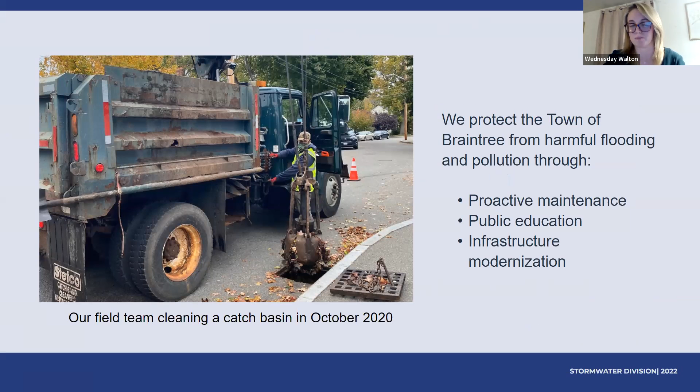So with that being said, what is the Town of Braintree Stormwater Division? We protect the town of Braintree from harmful flooding and pollution through proactive maintenance, public education, and infrastructure modernization. We came to be in 2018, and our official outreach mechanism is Clean Water Braintree. So we are on social media at Clean Braintree on Facebook, Instagram, and Twitter. We use our social media to give general stormwater information and educational pieces, as well as updates on projects, grants in the area, that kind of stuff.

And then we also are on SeeClickFix. So if you have any stormwater related issues that you would like to report, whether that is a clogged drain or you're noticing some flooding, feel free to report any of that on there. We do all get an update immediately when those are put through.

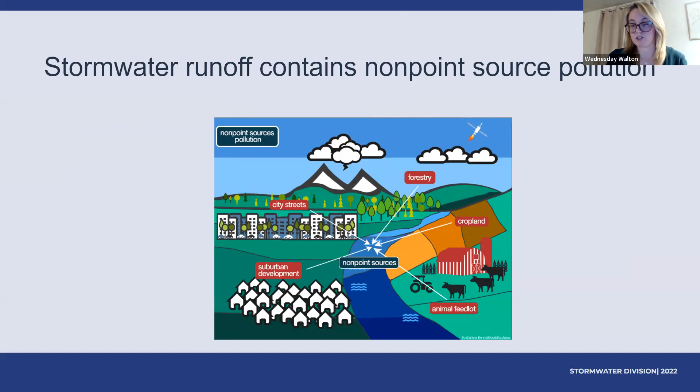So the reason why we created the Stormwater Division in the first place is because Braintree water bodies fail state quality standards. Non-point source pollution is the primary cause of these failures. Essentially, non-point source pollution is when rain, snow, sleet, any form of precipitation falls, that is stormwater. It hits surfaces like mountains, streets, developments, croplands, farms, etc., hits the ground, picks up pollutants, and carries it into water bodies. And that's what causes a lot of the pollution and a lot of those failures with the state.

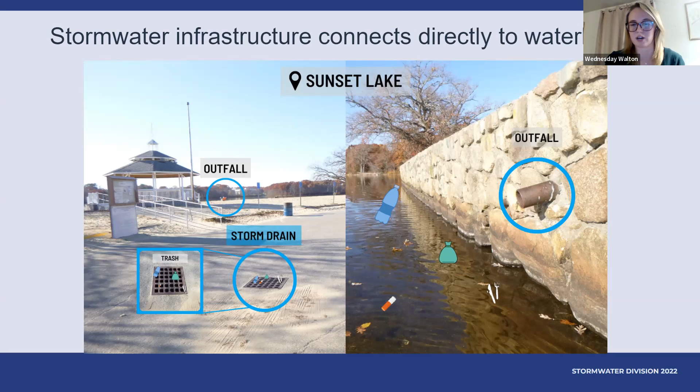Stormwater infrastructure is what takes that water into the water body. So as you can see here, probably one of our best examples and our most visual examples that you can go take a look at yourself is at Sunset Lake. We have a variety of storm drains around the parking lot there. And those storm drains connect directly to that outfall that you can see. So anytime there's trash, debris, leaves, salt, any form of pollutants, they go directly into that drain and then pour out into Sunset Lake, as you can see there.

So what is green stormwater infrastructure? Basically, GSIs, or green stormwater infrastructure, use natural and low impact technology to capture and treat stormwater on site. So a good example of this is, again, at Sunset Lake, we have a rain garden that captures the rain that comes in. The water soaks down and goes through a filtration system and then puts the treated water back out. You can also build these at home, but these are probably some of the most common ones that you see. And these are also what we like to use to try to fix any pollution that we have in the town.

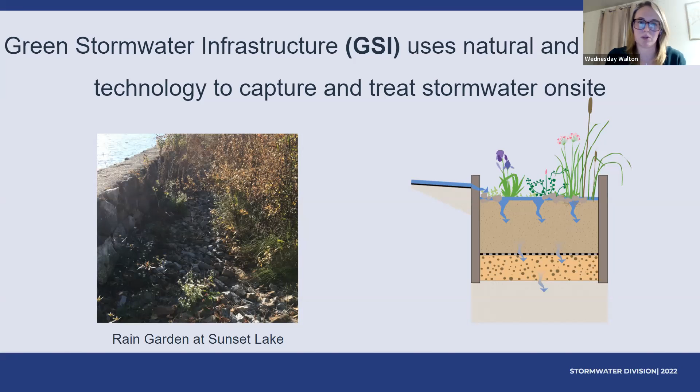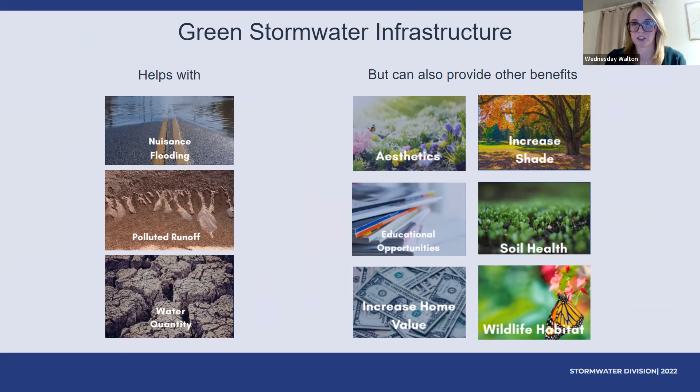These structures typically help with flooding, polluted runoff, water quantity, but also they help just boost the aesthetic of the area. They provide educational opportunities, increase home values, increase shade in the area, soil health, as well as wildlife habitat. So that brings us to the project that we are currently working on at Smith's Beach. And this is where I will hand it off to Hillary.

We eventually come to a point of conceptual design. We review that design, we refine it. We come to eventually final design. At that point is when we start to get permits from state, local, maybe even federal authorities, depending on the size of the project. Then we get our funding together, then we build. This can take anywhere from a few months to a few years. And so we start with, in this case, identifying a site.

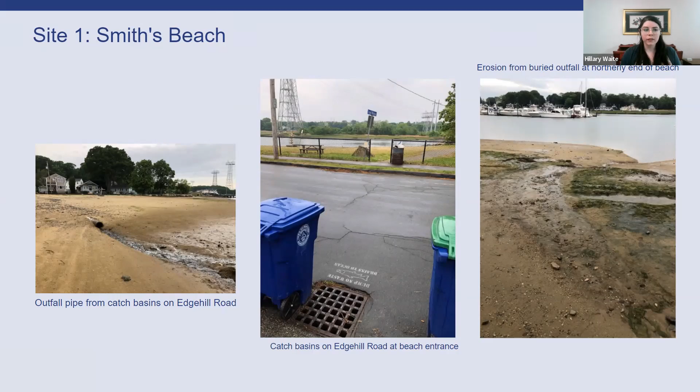And you can see from the street at Edgehill Road the stormwater drain where eventually it leads out to those outfalls. And that's the parking lot. Thank you, Wednesday. And you can see the parking lot doesn't drain very well. It's pretty wet, even though this isn't a wet day. And there's just puddles everywhere. The parking lot's a bit patchy.

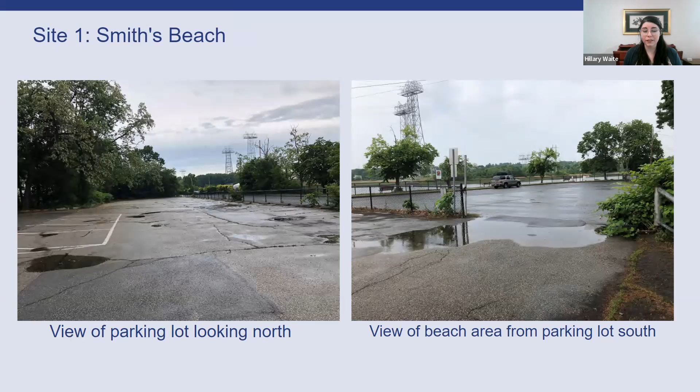So we're thinking maybe the next time we come back to this parking lot and do work on it, maybe we can make it a little bit better. So that's how we ended up picking Smith's Beach as a potential site. So from there, we had to study it a little bit further.

And some of the things that we do, we confirm the existing drainage in the area so that we know exactly what we have there, what we could use in future designs because it's already there. And we also, at this site, performed some soil tests to make sure that water could actually infiltrate. Does that soil drain well?

Is the groundwater level low enough that you could actually infiltrate into groundwater, or would it just be rising up into the project itself? So we know from the study that we've already done here that the groundwater table is suitable, the soil is suitable, we can do infiltration here.

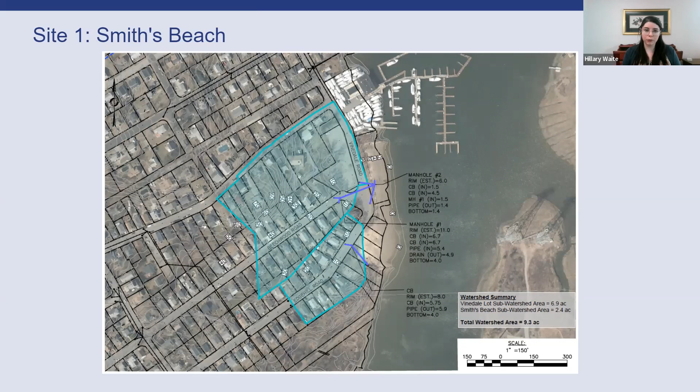And the next slide shows that upstream watershed for this project. So it takes some of that upland neighborhood, the stormwater that's coming through there and out those outfalls that we showed you, and instead it would kind of stop at this project. And that existing drainage that we already have will stay in place and we'll reuse it as overflow structures. So we know the site is good and we know the site will work.

So we go here to conceptual design. We basically put together a general idea of what the project will look like, what engineering strategies we're going to use, its approximate size and shape, and the goals for the project. And that conceptual design looks like this. And what we have here is the Vinedale Road parking lot.

We propose a porous pavement, also called a permeable pavement, which is a special type of asphalt that essentially lets water run through it instead of off of it. And in the beach itself, a smaller infiltration trench to help us take some of that drainage and infiltrate it down through soils and groundwater instead of out through that outfall, creating all that erosion and scour in the river.

And can we go back for 1 second? I also want to talk about the landscaping there. We also have observed this parking lot. It's a blacktop. There's not a lot covering it. And we took this as an opportunity to say we could add some landscaping here. We could reduce some of that heat island creation. And so that's why even in our conceptual design, we show trees and landscaped islands.

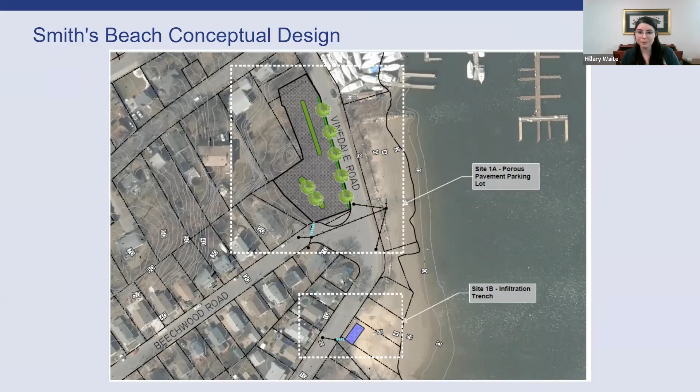They're pretty, they're shapes and you can see the trees, but now as we go forward with the design we're about to show you, you'll see there's some pretty significant and good looking landscaping planned there. And we're almost there. So now the stage we're in is design review. And so we're drawing closer to this final design. We're drawing closer to the permitting process, but this is a good time for us to come out and specifically ask for feedback on the details.

And to go over those details, we have our engineers here from Nitsch, which is excellent. And I am going to give them their full introductions as they're due.

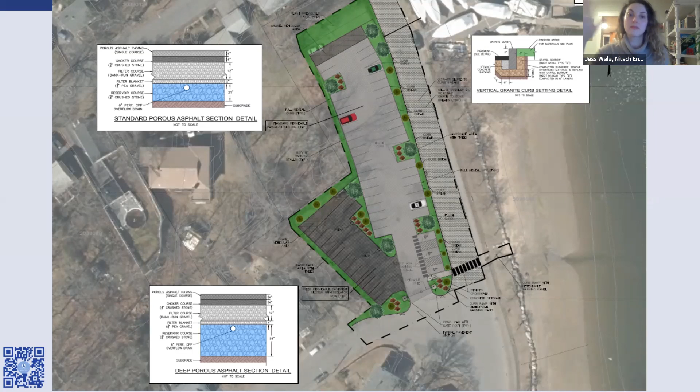It'll allow us to really collect that water off of Vinedale through those curb breaks that we described. And it will provide shade trees. It'll be aesthetically pleasing compared to the current conditions out there. So that really makes up the majority of the system components. And lastly, you'll see that the curb alignment at the entrance is slightly modified. I think this is in line with a lot of the work that Public Works has been doing to provide some traffic calming, make the road safer, and add some green space in there as well.

Great, so this plan kind of describes what's going on below grade. So that previous image was really what it looks like at the surface. And this describes kind of the infrastructure that allows us to really collect water from Vinedale, from Beechwood Road, direct it to that infiltration system that we show in blue, kind of on the westernmost portion of the parking lot. So water will really all get collected there, treated from the outside sources, and then anything hitting the parking lot will make its way directly through the surface.

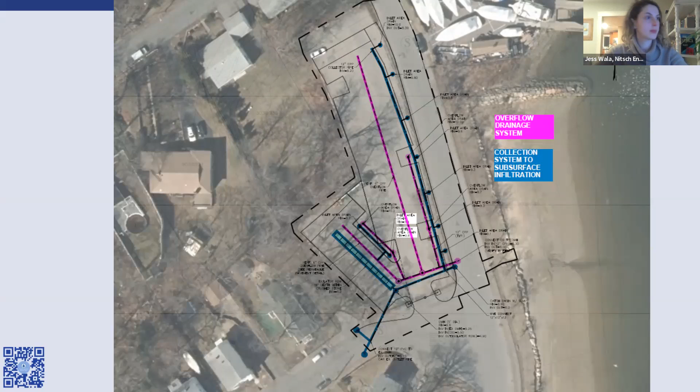And we also have some backup systems like I described in case water's flowing too fast or anything becomes clogged. They will act as a backup and continue to get water below grade so that it's not directly running off to that outfall.

And so as a result of this system, what we're really looking at is, and this is a much smaller system, but this is located at the outfall. What we're looking at here is picking up runoff from Edge Hill. Similarly, this has a pretty sizable watershed draining to it as well. So we'll be treating a pretty big area with this. We send it to a water quality structure, which is really a prefabricated unit that treats runoff for sediment, and then we'll be sending it to that infiltration system where we're really getting the majority of that water treatment.

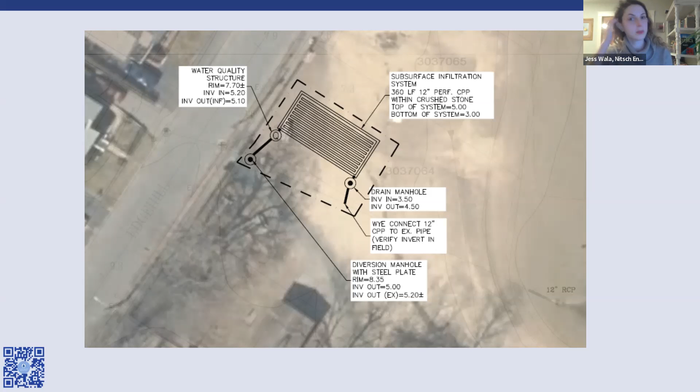Great, and this is just a cross section of what these systems look like below grade. The goal of this project really, there's multiple goals. Water quality treatment is one major goal in these systems because we really have that capacity to just direct that water into the ground. That's really one of the best treatment options.

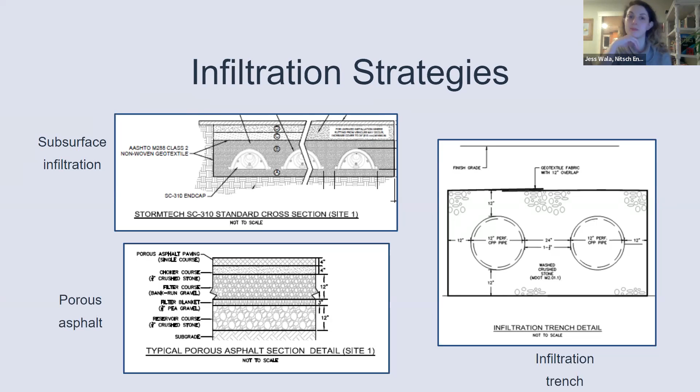We're treating it for sediment, but also this removes phosphorus from the water that's flowing out of these systems into the beach. It removes bacteria and other pollutants of concern. So by infiltrating, you're getting rid of that dirty water and ensuring that what comes out from those outfall pipes is much cleaner than what's coming out in the current day.

But thank you again for your availability tonight and for walking us through that, because I think you have done such a great job making this not only an excellent project, but an excellent project specific to Braintree and specific to this location. And we're excited about how well it fits into where it belongs.

And so that brings us back to our project timeline. So this is where we are. We're in design review. We're hoping for feedback. We want to make sure that when we go forward, we have all of the information that we might need from the public. And I want to talk about where we're going. So we're in design review.

Tomorrow, we're going to discuss this project informally with the Conservation Commission, and we're going to get some preliminary feedback from the commissioners. Between that meeting, which is tomorrow, and their next meeting in March, we're going to be hearing feedback, incorporating feedback, and working on these designs, refining them a little bit more. And then we'll submit to the Conservation Commission in March for an actual permit under the Wetlands Act. So we'll submit our notice of intent for ConCom in March.

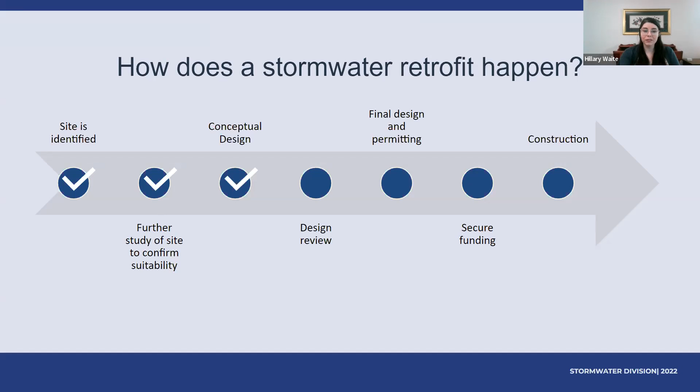And an example of this happening recently is we had a conceptual design at the Council on Aging. The Council on Aging had additional paving done this year for their parking lot. And we're going to be able to construct more stormwater retrofits over there through a grant because we had that conceptual design ready to go. So it's really good to have these handy when the granting agencies go, hey, there's funding available. And we go, we have a great idea. Check this idea out. And I hope you all also think it's a great idea because we're very proud of it. But we can move to the next slide because it's almost your turn to talk.

The one thing I want to go over before I open the floor is some FAQs. What will this project cost? Again, it's going to be about $770,000. It's fairly expensive on the order of stormwater retrofits that I've seen. And I've seen them mostly on the local level. I haven't seen really huge ones. This is definitely a smaller scale. This isn't a whole park. It's just one small parking lot and the surrounding beach area.

Some folks ask who will maintain the structures if they're built. That's going to be the stormwater division. We consider this equipment, this material to be part of our system the same way we do catch basins, manholes, and pipes in the street. So it's the stormwater division's responsibility, and we will maintain it because it doesn't work for treating bacteria and sediment if it's not well maintained.

And lastly, because I get this question a lot, no matter where the project is, no matter what the project is, people ask me, will the project cause flooding in their neighborhood? And the short answer is no, but I will elaborate. Basically, when we design these, we are designing them to treat as much or more stormwater than the current system moves and treats. So we're not increasing the amount of water anywhere. We're just moving it and conveying it and eventually getting rid of it in a different way.